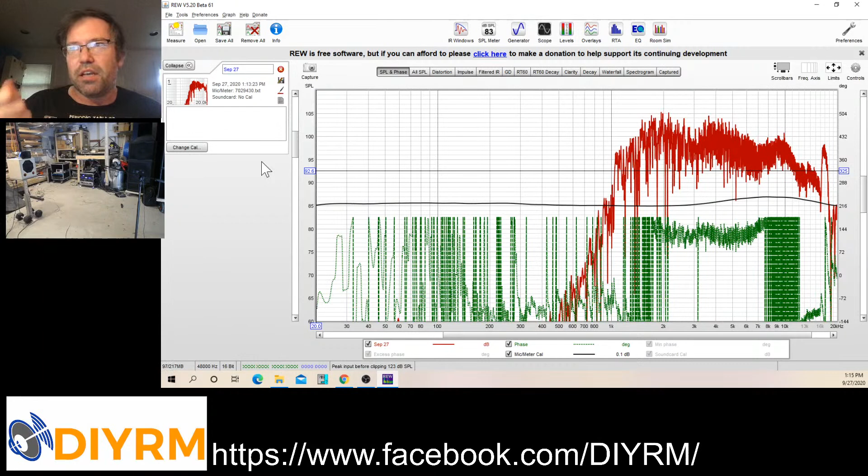Okay. Now, the default for REW is a quite wide window. It's a gated measurement system. We can zoom in on a period of time that we want to look at that is quite small. And as a result, it narrows down and eliminates the room reflections and all sorts of other things, which is what we're seeing here. We're seeing all of the echoes. But I don't like the default impulse display. So I'm going to go over to the impulse window here. And this is what you see when the program first starts up.

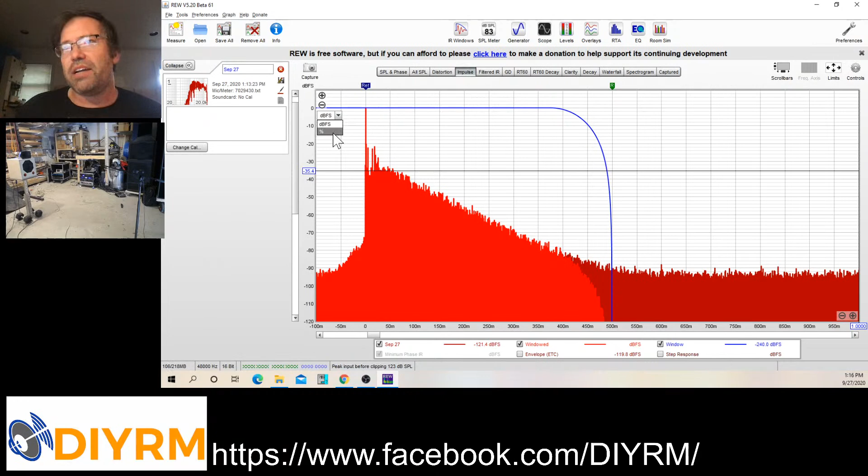So what are we looking at here? We're looking at energy versus time, in the units of dB. If you're doing room acoustics measurements, this is actually a very useful display, but when you're trying to look at a speaker, this is not a useful display. I have never found this particularly useful. So I change it to %.

And now you've got a picture of the impulse, still very long, right? We've got a second of time displayed here, which for measuring a speaker is forever. Okay. That is a very, very long time.

What you can do, though, is use the graph here, change your graph axis limits to go to a reasonable time. And if you're measuring speakers in a room like I am, the time is very short. Sound is fast, right? 343 meters per second at room temperature and sea level. And so you end up having to really zoom in on it. Whoops, wrong way. And now I am looking at a very, very small section of time. Okay, I am looking at 20 milliseconds of time. So this is a very, very short section of time.

And what you see is this is the primary impulse coming from the tweeter. And this is the first reflection, whether or not that's floor or ceiling. They might be lining up pretty close to it at the same time where they are, right? So we're going to want to set our window, the period of time that we're looking at, to be only that little bit, okay? And there's a couple of things that you have to watch. The first thing is you have to watch where your reference time is.

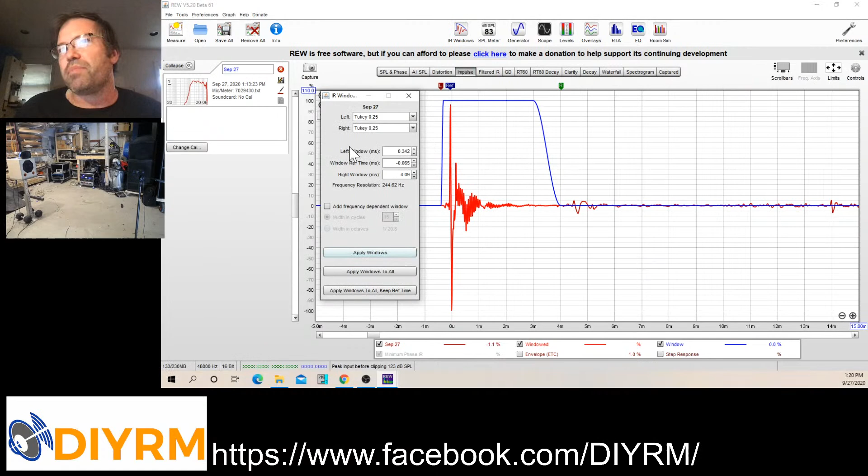So I'm going to go back to that impulse window and drag this back here, and now I've eliminated that, okay? Apply that. Now we go back to our SPL window. Now I've got the SPL for the tweeter, all right? This is a useful speaker measurement, okay? You can actually see what's going on here.

Remember earlier when I had the limits set really wild? I'll do it again. Like quieter than the sun, or quieter than a molecule. We'll go louder than the sun, right? You see this all the time. That's not louder than the sun. That's just a car audio. But you see this all the time where now people are looking at this and say, oh, look how smooth my speaker is. Well, it's not. You've just plotted it so smooth, right? So back to useful settings, okay?

But what we don't know is exactly what voltage we put into the speaker, okay? I have just set it up, I've set the volumes, and I've played the tone, and I have no idea if this is a 2.83 volt measurement. So what I'm going to show you is how to measure that, right? So everybody with me so far?

Do we have any questions? Can you hear me? Am I just talking to myself for 29 minutes, which would be awesome? It would be like a normal Sunday, really. This delay is killing me. You guys are seeing it probably a good 20 seconds or so after I do it. All right.

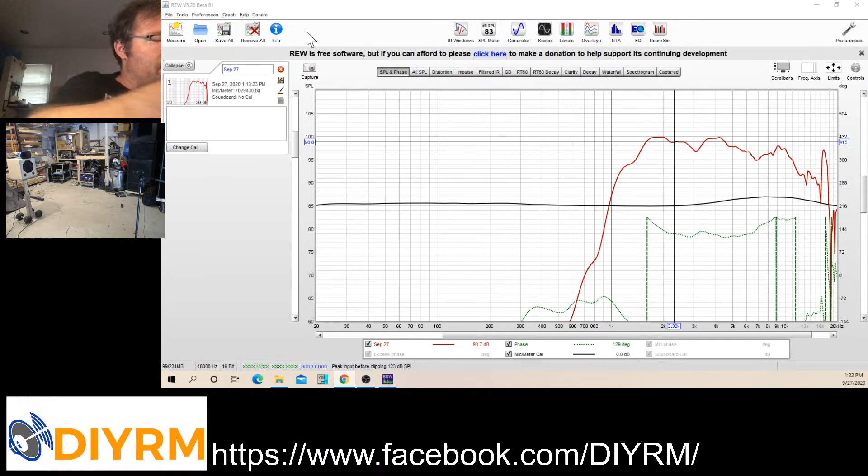I've got a wire issue happening here. Hopefully we don't hear a crash or a bang or Scott crying because I dropped something expensive or unplugged the live stream. Hold on, I'll be right back. I gotta go get that wire.

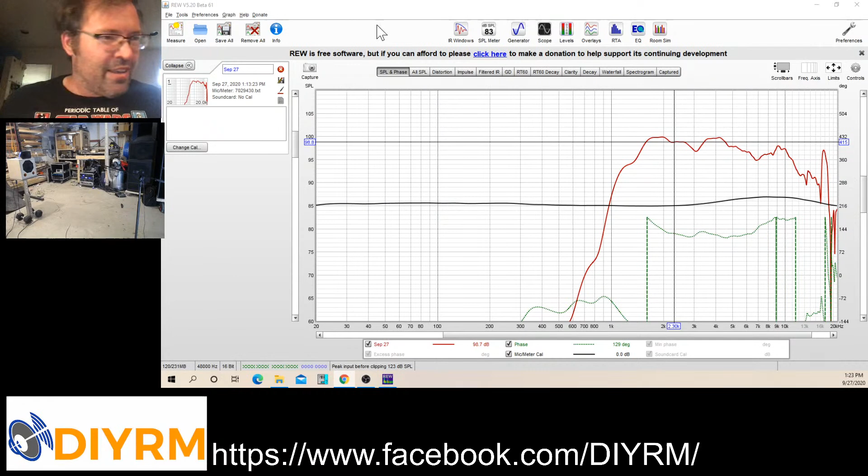Okay, so I have a trusty voltmeter with an untrusty battery. It is going on me. I don't know if you can see this. Okay.

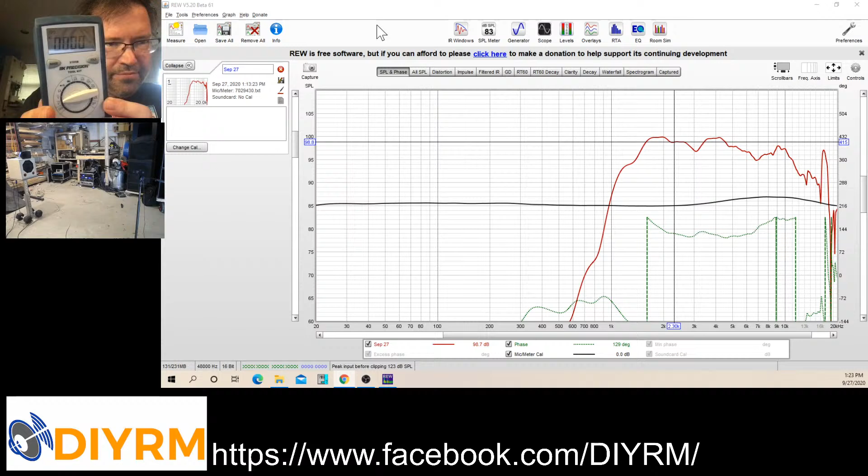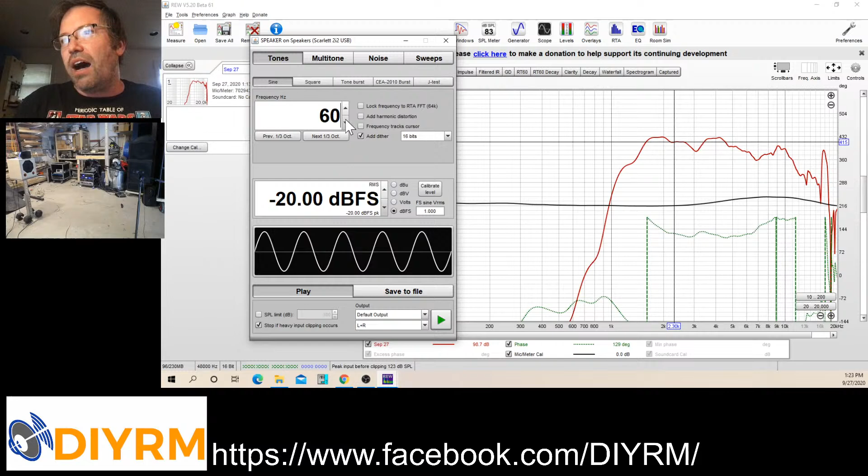What I'm going to do is I'm going to use the generator function of the REW. Okay, and I'm going to go to 60 hertz. Use 60 or 50 hertz because even inexpensive DMMs will read that properly. If you're too high in frequency, they're not going to read it accurately. Like aircraft power, internal AC aircraft power often is 400 hertz. They might be able to do that, but sometimes when you get into the 1,000, 2,000 hertz range, they don't read properly.

And what I'm going to do, since I've got everything unplugged, I am going to do something relatively scary, and that's go to 0 dB full scale. I am going to put the full scale output of this thing, and I'm going to double check that I'm unplugged. Yeah, okay. All right. We are, no. I'm fooling myself. I'm not unplugged. Hold on.

Double, quadruple, triple check. Okay. Now we're good. That could have been bad. 10 volts RMS into a tweeter at 60 hertz. Poof, tweeter gone. You know what? All right. I'm going to start off. We're going to do just a quadruple billion check. We're going to make sure that we're not putting anything out into the tweeter. We are not. Okay.

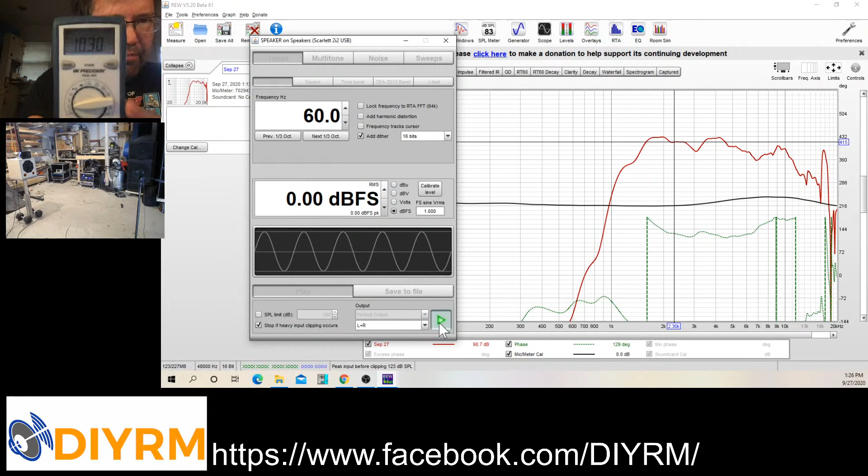So I'm going to play this 60 hertz tone now that I know I don't have the tweeter connected, and I'm going to show everybody what I'm measuring. Okay. So I am measuring 10.3 volts. Now, here's the coolest feature that has been added, to me anyway. I found this stupidly useful. Notice there is a full scale sine VRMS. I'm going to type 10.3 volts here. I am now going to click on volts. And now it is displaying the output in volts.

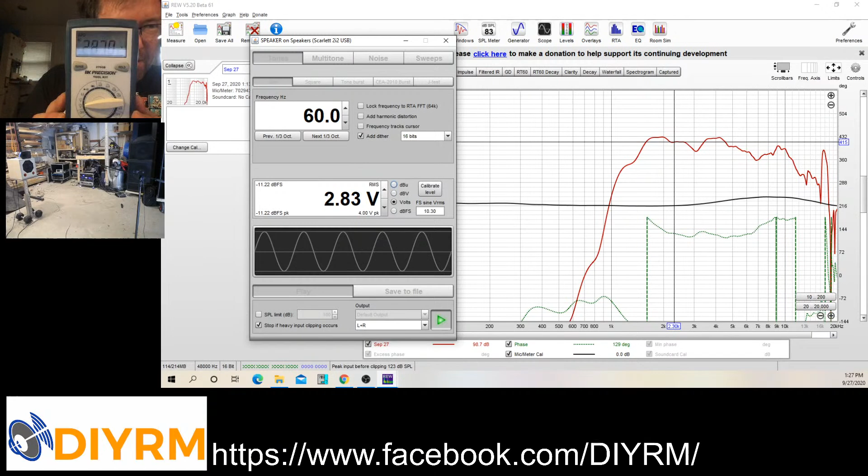All right. And now I'm going to change this to 2.83. That is minus 11.22 decibels full scale. I didn't have to do that math anymore, which is what I used to have to do. And lo and behold, what is the DMM showing? 2.86, but close enough, right? For our purposes, I'm not sure if it's the meter or the gain or whatever, but that is close enough to a 2.83 volt measurement.

So now I can start measuring and find my true 2.83 volt 1 meter sensitivity, because the calibration file for the UMIK has that. It should be reasonably good. I haven't checked this one against my Cross Spectrum Labs mic. It should be, in terms of absolute SPL magnitude, and it should be reasonably good for frequency response. It's probably going to be a little bit wonky, at least historically they've been a little wonky above 15 kilohertz. But now, as long as I don't touch any of those volume controls that I had, I have the ability to specify voltage into the speaker driver, which is really cool, okay?

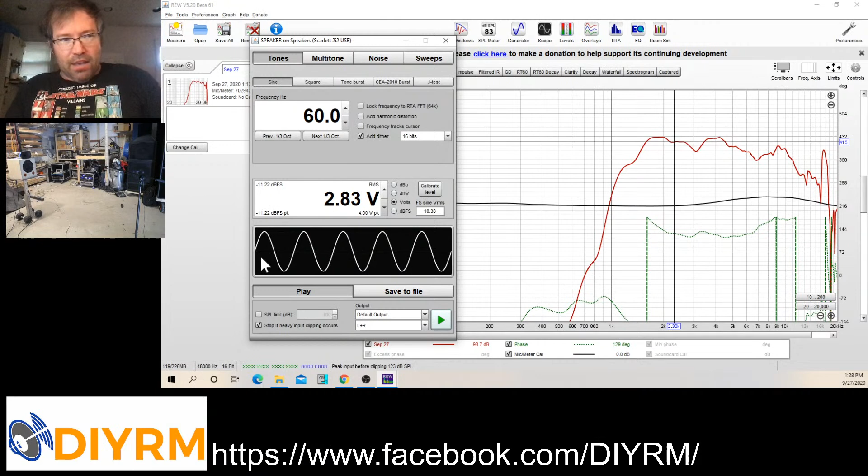So now I'm going to stop my 60 hertz test and hook everything back up. You're hooked up. You're hooked up. Oh no, you don't want to be hooked up. Sorry everybody for my chin. Okay. So now I am going to take another measurement, and I did not plan well.

So now that I'm at 2.83, I am going to do this. I'm going to be nice to this tweeter and not do a 2.83 volt sweep at 20 hertz. So now I'm going to do a 2.83 volt sweep from 400 hertz to 20 kilohertz, and this is going to be loud. So I'm going to plug my ears after I press start.

Okay, now look at what has happened. We have a much louder signal. I'm going to have to move this scale up. And we have gone back to our old wonky looking frequency response graph.

Well, there's a way to make this easier so that it does this for you every time. Remember those settings that we had for this one? IR windows, left window 0.33, right window 4.08. You can set that up as a preferred analysis. What you do is you uncheck set window widths automatically. We'll just put 4 here, and we will put those in.

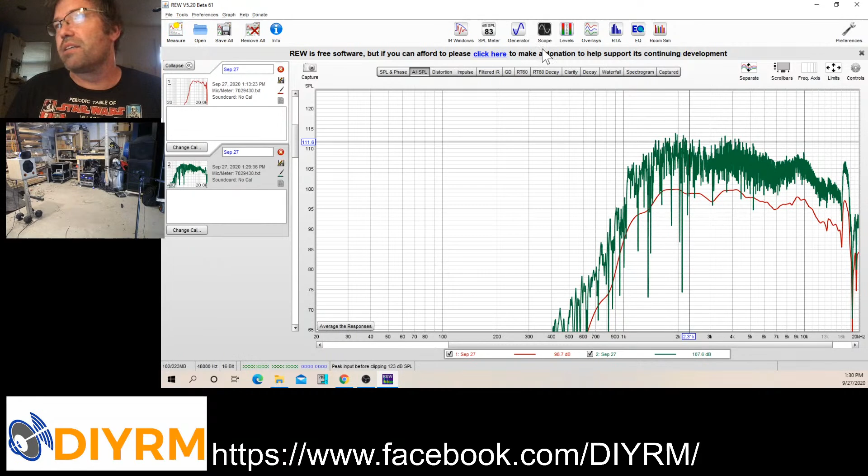And now I'm going to take another measurement, assuming I did it right. Let me go make sure. You can also, if you want to, have it do a little bit of smoothing every time. I'm not a fan of smoothing. Like, I despise it 99% of the time. So, all right. I am going to take another measurement. Here we go.

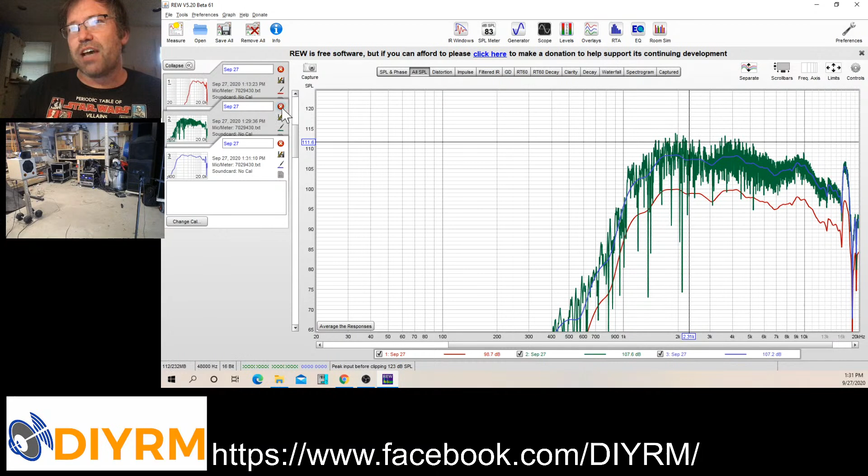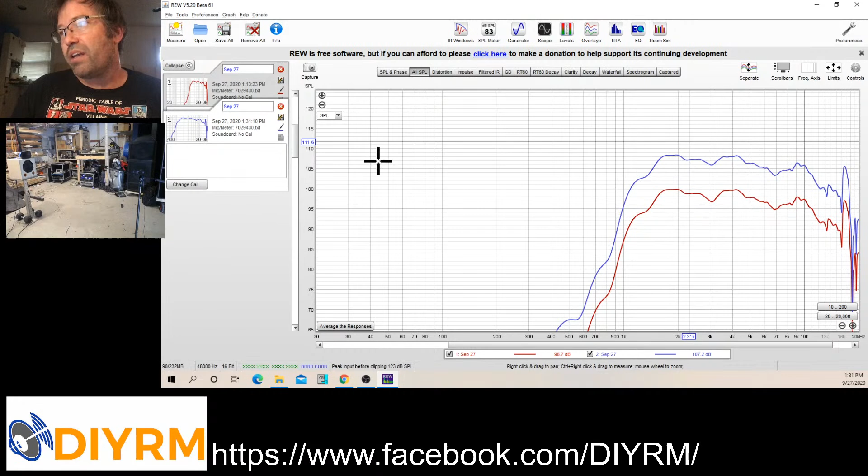And lo and behold, what happens? The measurement comes up and it's gated just the way we want it, and we don't have to go type that in every time. So I don't want this one anymore. So we have now taken a 2.83 volt, 1 meter calibrated, because my microphone's at 1 meter, SPL measurement for this tweeter. We've eliminated the room reflections, we have basically set our windows right, and we've calibrated it to a fixed voltage.

And my battery is running out, so I'm going to remember to shut that off, because I don't have any other 9-volt batteries. The kids have swiped them for their toys.

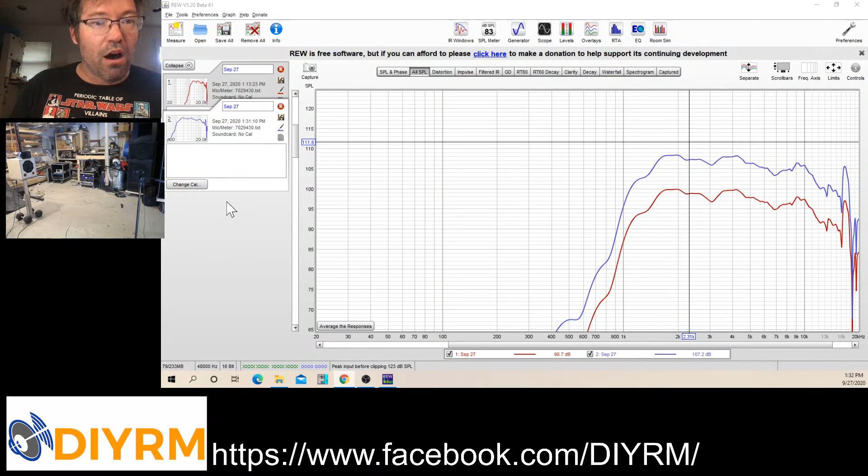We now have a good frequency response measurement. REW, because it's a swept sine measurement tool, does other measurements at the same time. One of them that's really, really handy is distortion. Okay, so I'm gonna click the distortion screen. As it stands, the distortion measurement as its default display, I don't find particularly useful.

My degree is in electrical engineering. I've done amplifier design for so many years that I'm used to looking at it in terms of percent, not in dB under the fundamental. So what I usually do is change it, using the units here, to percent. It'll automatically, on the newest versions of REW, change it to relative to fundamental. At least that's what I read in the manual this morning. And then the catch is that it usually puts the bottom and top so far that it's fairly useless.

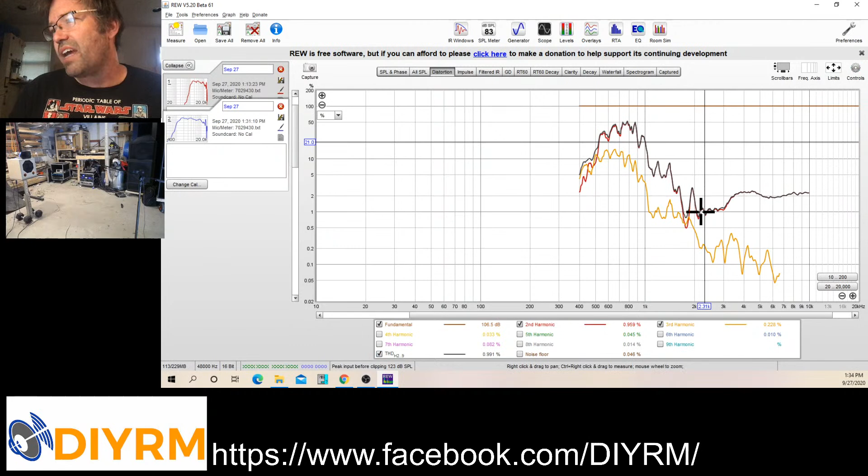I sometimes find the harmonics useful to look at, but for the most part, I usually just look at second and third and THD. And so at 2.83 volts, second order harmonics dominate. This spike might be a little bit bothersome in a final speaker, so you might have to do a little investigation on that. But they really don't take off till about 1.8 kilohertz. So you could probably cross this over fairly low.

Let's see, Brian, yes, I usually do almost all my measurements at 2.83 volts or higher, because I will very often go to this distortion screen to tell me if the driver is behaving at these levels. You have to be careful, especially with tweeters. You don't want to be doing a 2.83 or a 4 or a 16 volt sweep with the tweeters at low frequencies. You want to start at like 400 hertz or even higher. You let the distortion, and frankly how they sound, tell you if you're pushing them too hard.

I have had tweeters complain to me mightily, and I've actually blown them up once or twice on this, but I have found that to be extraordinarily useful for checking how well I think they're going to do, and where I need to be crossing them over.

So yes, I do run almost all of my sweeps at 2.83 volts. And for the horns that you can see over there that are 105, 108 decibel sensitive, my neighbors hate me, and my family hates me, and I'm okay with that. I can live with it for the purpose of science. It's all about the science. Anyway,

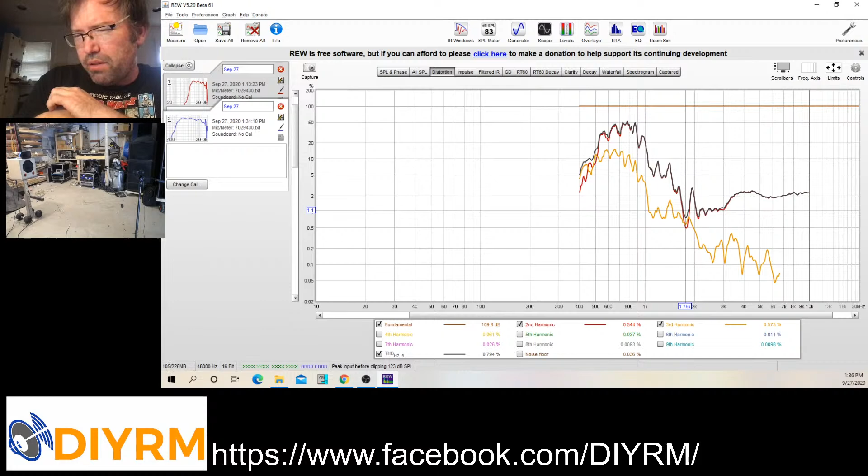Brian, let's see, when you run your sweeps, it's not loud at all. If I turn it up, it gives an error. Okay. Without knowing, I'm guessing the error is the clip detect error, and that could be caused from a couple of things. So yeah, message me over on my Facebook page. The link's there.

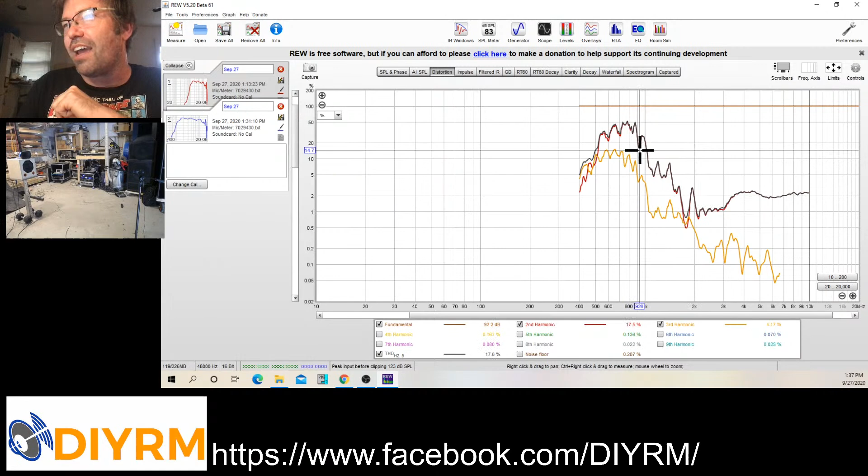500% at what's this, Brian? 500% THD. This tweeter seems upset at that level at 8. It's not 500%. It's just 50%. Where are you seeing 500%? And frankly, that's probably dominated by the room noise, Brian. I'm not real sure that that's really real. You can see if I go back to dB full scale, you can see that at that point the tweeter level is starting to drop off. So as it's dropping off, the room noise is starting to come in and pick up. Okay, so that's what you're seeing there.

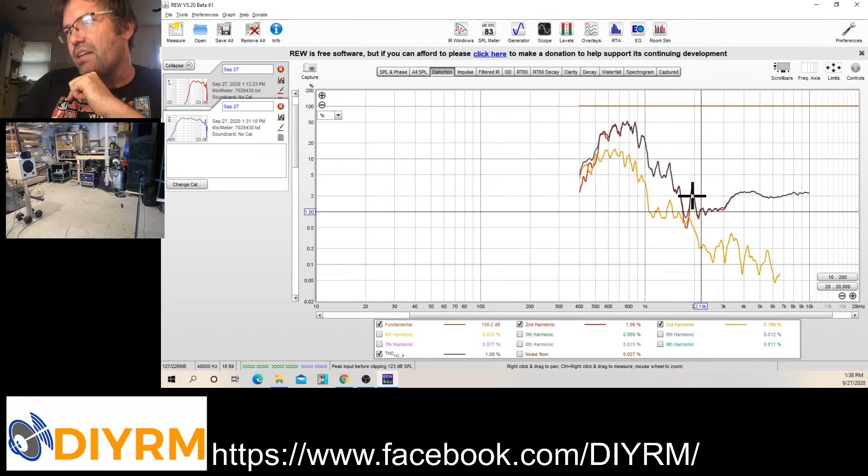What I'm looking for is where it starts to take off like this. Like it's good, drops, and then starts to pick up. This point right here, and as I said, this is somewhat concerning. This may be a little honky if I don't cross above that. Like I might want to try and do this at 2.2. I'd have to see, let's see. Yeah, it's in both these measurements. So yeah, I'd have to see exactly what's causing that. That may also be because I've got that tweeter horn just sitting there. That may be a bell resonance picking up on that harmonic and accentuating it. So we have to look at that.

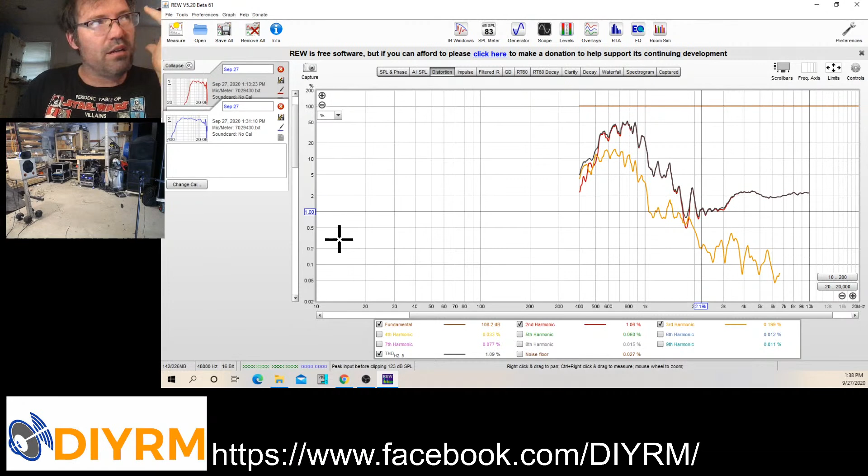Sorry, 50%. So that, and honestly, as I said, because that's room noise, I don't know how it came across on the video. That actually sounded pretty clean the whole way through. Your ear, depending on which harmonics there are, is very happy to ignore 5-10% harmonic distortion. It depends on frequencies and which harmonics they are and things like that. But second order harmonic, it's just not going to sound that angry. Dome tweeters sort of get angry slower. Compression drivers like this one, it'd be okay, and then it'd honk at you and it'd be really ugly.

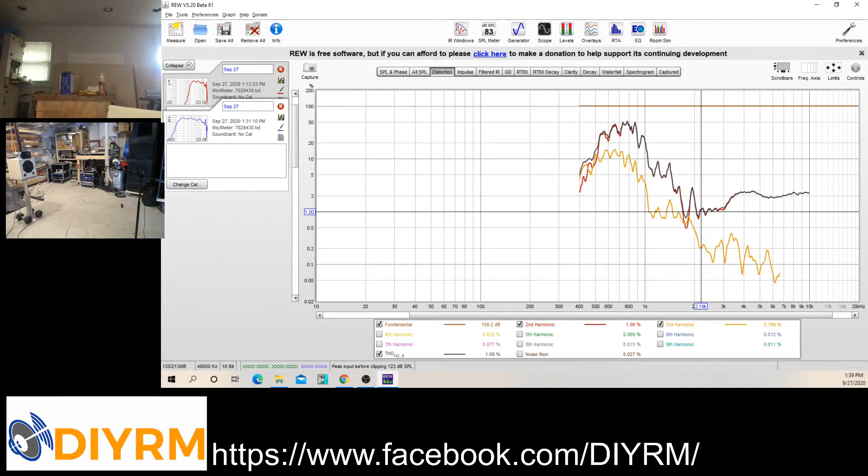Okay, so now I've taken the measurement for the tweeter. I'm going to go switch the wiring around and we're going to take the measurement for the woofer. And I'm not going to move the microphone. I'm just going to go change the wiring around. Be right back. Okay. Don't trip and fall. Okay. So now I have the woofer hooked up. I am still going to do this at 2.83 volts, but I'm going to go down to 20 hertz. And I'm going to take the measurement.

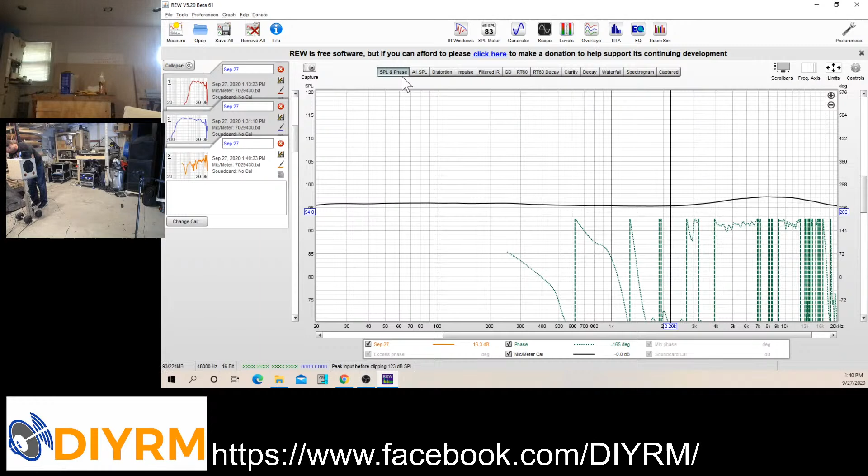Oh, something's wrong. Tech demo, live. Of course, we had the problem. What happened there? Do I have a bad cable? I'll be right back. Oh, I know what happened. Dang it. All right. Well, okay. Yes, we want that measurement removed.

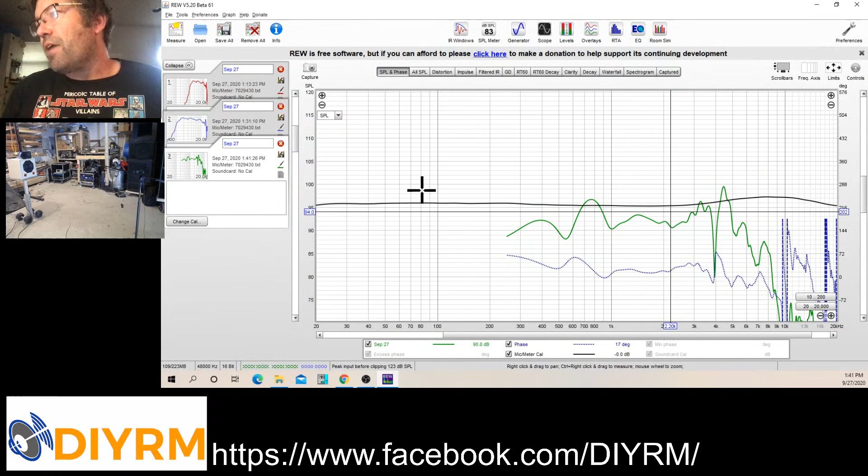Okay, so now I have my woofer measured. I'm going to have some crossover work cut out for me. Yeah, that's going to be neat. All right. So now I'm going to go to the all SPL measurement. Now I'm going to remove this one. Okay, so now I have both the woofer and the tweeter measured.

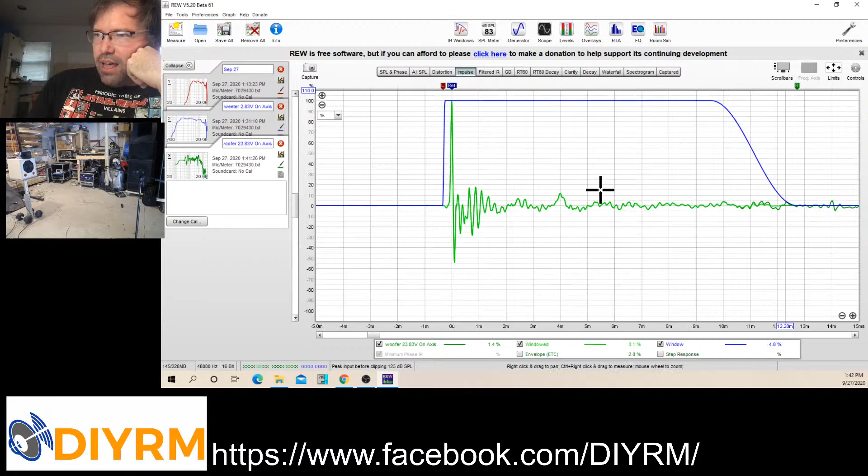But I have them measured at 1 meter. And what that means is that I am limited below 250 hertz because of room reflections and things like that. If I try and get data, I'm going to see room reflections added in, okay? So what that looks like for the woofer, and in fact, looks like the woofer's starting to creep in, is this. Okay, so as I move out, you see all that ripple start to kick in. Oh, it automatically applies that now. Cool.

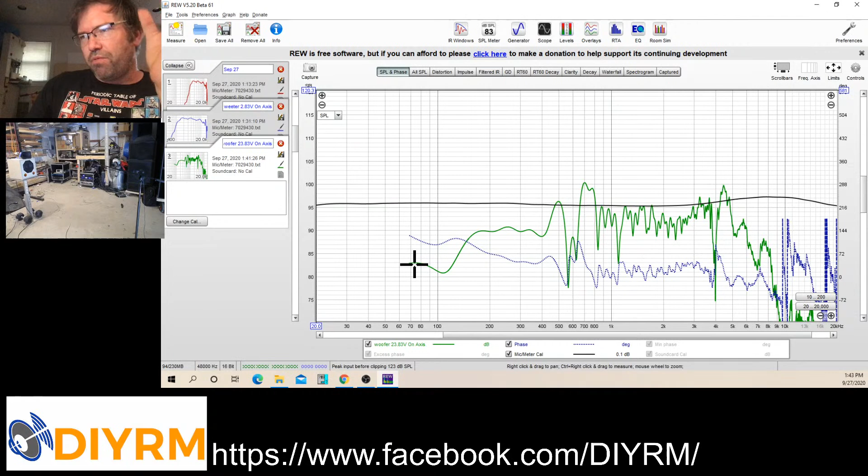If somebody looks at this, frankly, they're going to be horrified, and it's not a good measurement, and I've got all sorts of room stuff in there. But you start to see baffle step kicking in, although this seems to be a little bit low. So this may be a perfectly good example of why you can't trust an in-room measurement, because a lot of times those reflections start to add peaks and dips where your baffle step frequency is, right?

And that is bad. You're basically lying to yourself if you believe that, right? So I'm going to go back and change this. We know what the reflection amplitude is.

Okay. Now, I'm going to do one other thing here, and that is I am going to measure both the woofer and tweeter simultaneously in parallel. When you do this with like 4-ohm speakers and stuff like that, you need a pretty healthy amp to do this. But this will come back later, and we won't be able to finish this because I'm already seeing them at 52 minutes.

But you'll use this later when you put these individual responses into your crossover simulation software. You'll use this to check your relative offset between your tweeter and your woofer, so that you have that right, okay? If you can't get that right, then your crossover modeling isn't going to be right either, okay?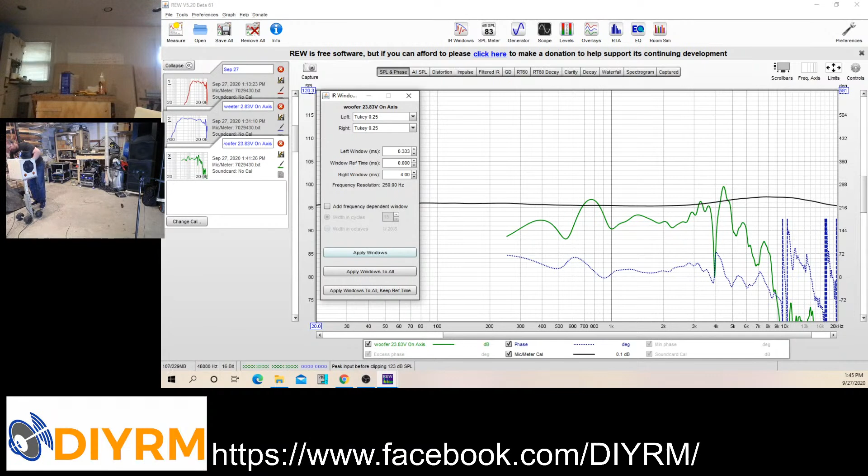So let me do some more wiring. I had no idea how much wiring I was going to be doing on this thing. Now, this is where you have to be careful. I don't want to do this to my poor tweeter at 2.83 volts at 20 hertz, although I've done it, it'd probably be fine. I'm going to change this to 1 volt RMS, also to keep the volume levels reasonable.

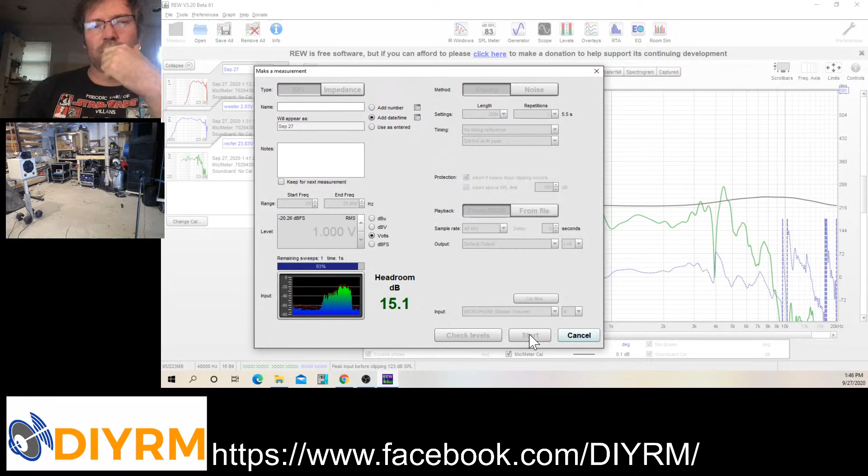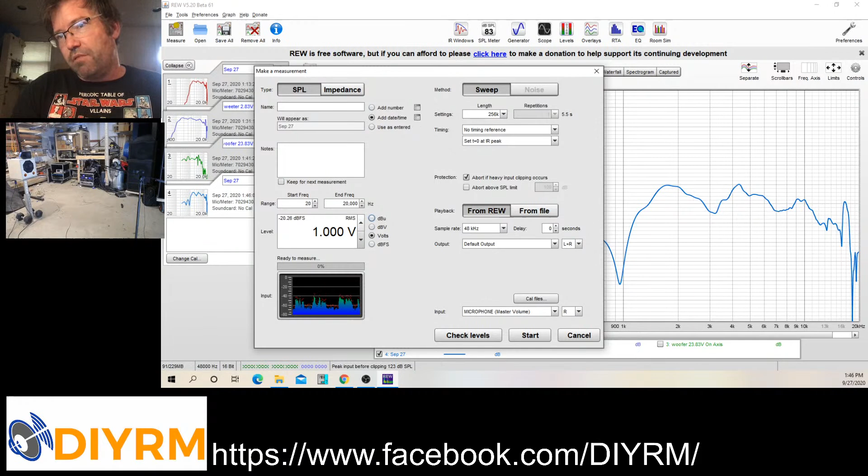Okay, so now I'm going to go back to this screen, tweeter off, woofer off. There's a couple of things that we can do. One of the things that we can do is that if we look at our measurement here, 1 volt is minus 20.26 decibels. 2.83 volts is minus 11.2. So that's roughly 9 decibels, roughly, right?

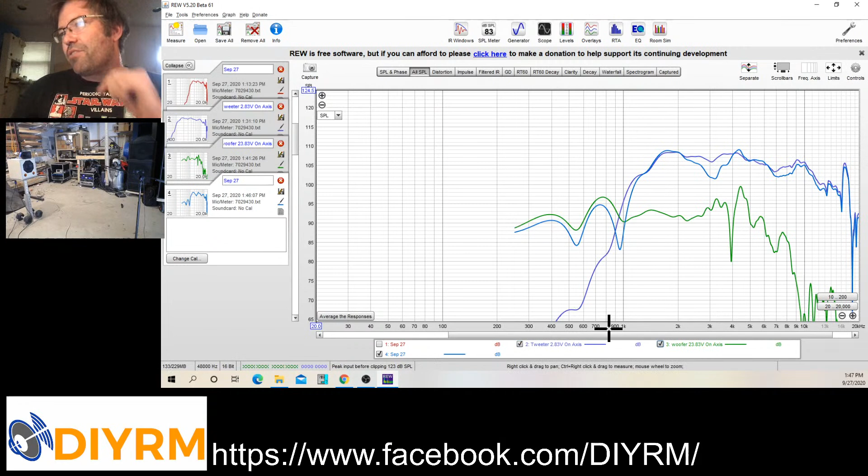So what you can do is you can now take this measurement, and you've got some actions. Oh, he changed this. You can add 9 dB to this. Now, it's back up to that level, and I didn't have to make myself deaf or worry about breaking a tweeter. So now I can go through and, looks like I might have added a bit too much to it.

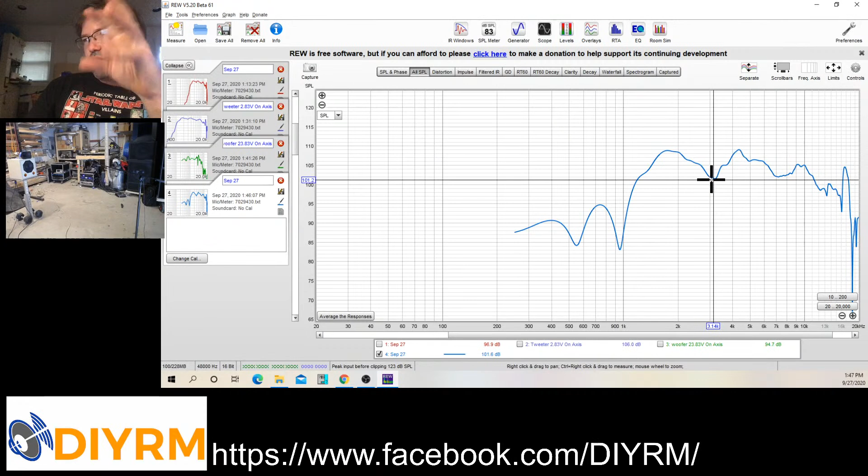But the important thing for this is that, see how it's got some dips here? When you put this into your crossover simulation, and again, this is sort of more advanced stuff, and you run the tweeter and woofer without a filter, if you're not seeing these dips in the right magnitude and place, then you don't have that acoustic offset right between the tweeter and the woofer, okay?

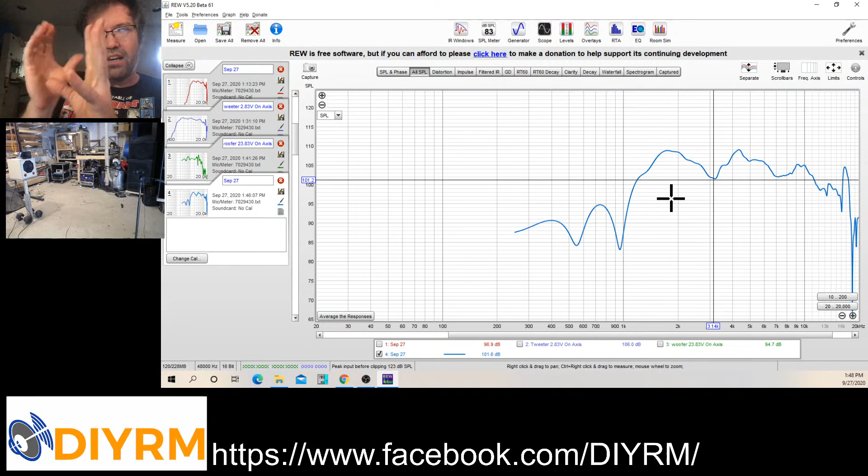And that means your crossover, when you simulate it and you actually build it, is probably not going to sum quite right. Sometimes the errors are small, sometimes the errors are very, very large. And this has driven me crazy. I actually had a speaker where I didn't realize there were some digital delays getting in there, so there's often some issues with this. That's part of a whole nother video that I've got to do, and so we'll hit that at a later date. Okay, now I'm going to do some near field stuff.

Okay, so notice that I haven't moved the microphone. In the past, I have actually put a stick on a stand, so that if I ever need to bring the microphone back to this location, I can. Because sometimes you lose measurements and things like that, and you need to be able to get back to the exact location that you were before.

I've actually known folks that will never move the microphone. They'll just have a second microphone that they use for the near field stuff, and they switch between the two of them. In this case, since it's just a demonstration video, I'm going to move the microphone, which means we've lost our reference place forever.

Oh, there's one other thing I want to show. The impulse response. In fact, I'm going to do this one more time. This is a cool thing. Okay, good. I'm back to 1 volt. The impulse response. Okay.

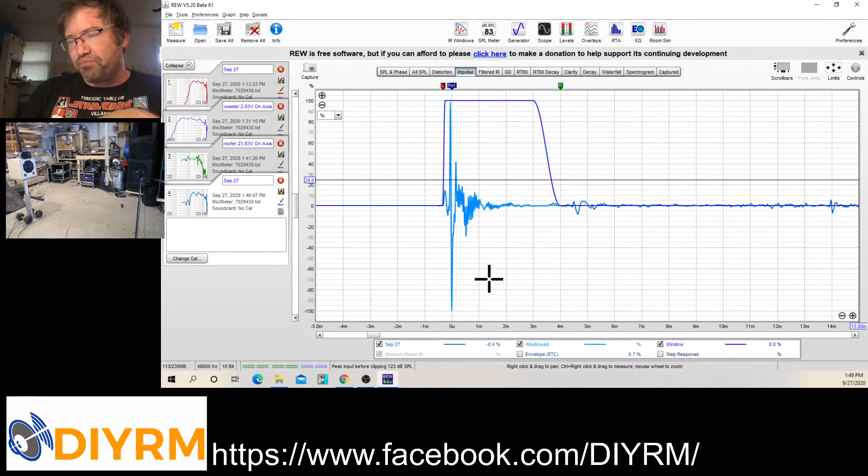There's a cool trick you can do, and again, another video. I always run out of time. There's a cool trick you can do with a second speaker next to the microphone where you can check offsets. There's also the loopback method. There's all sorts of cool stuff that you can do here. But this impulse response, let's see what it looks like as a step response. Nah, it's not going to be helpful.

It's basically showing that right now, it's looking like, to me anyway, that the tweeter is arriving slightly after the woofer is starting to arrive. So you know what I'm going to do? I'm going to go move it. We can do this.

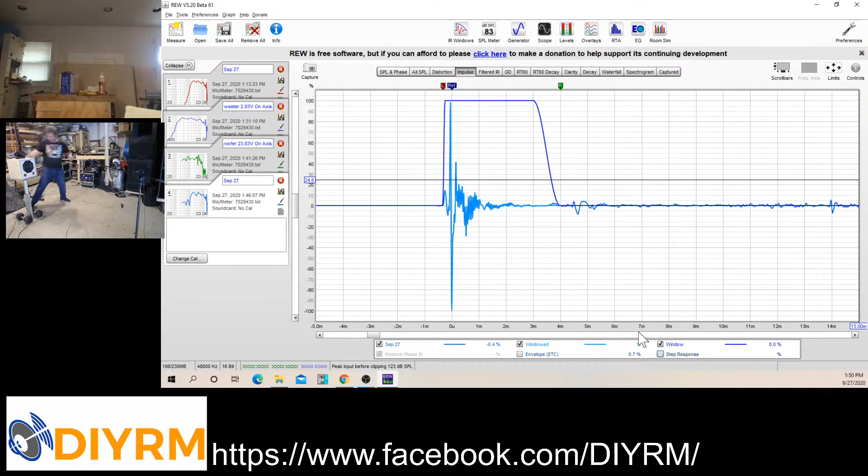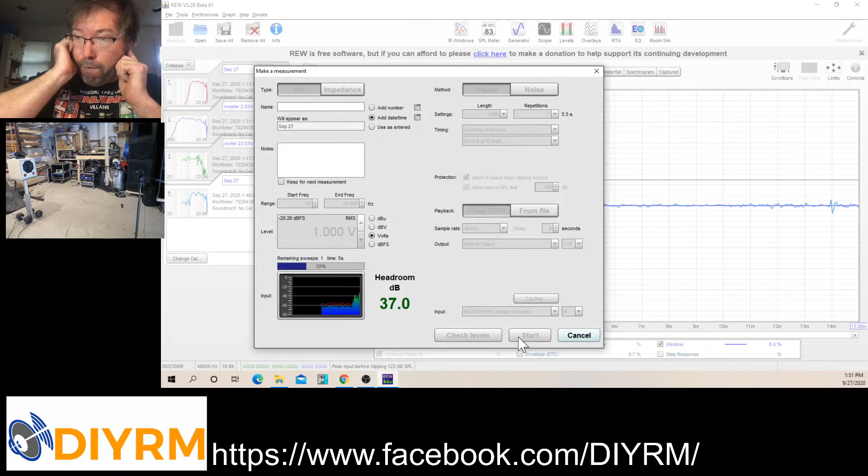Okay, now I've moved it back a pretty good distance, and what we're going to see is the reflections creep in from the top of that speaker box, because there's no way it's going to miss it at this point. Oh yeah, look at all that hash up top. Aha! Okay,

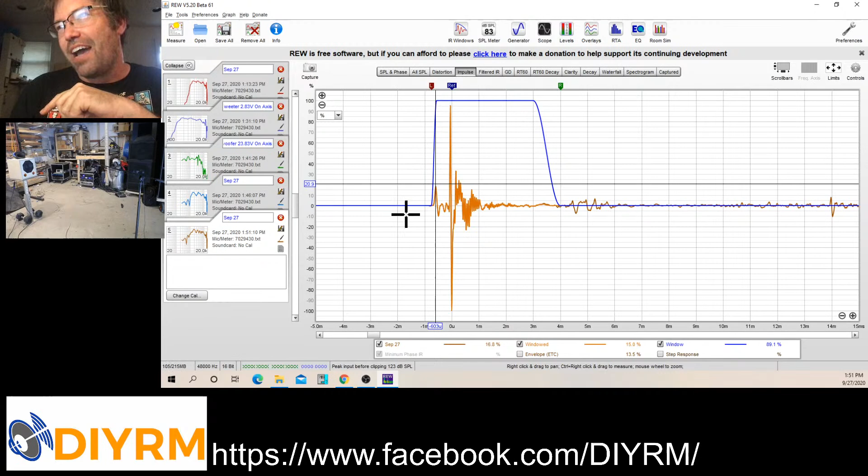so here is the tweeter, and way in front of it now is the woofer. In fact, I'm not even capturing the woofer. Now I've got the woofer, okay? And now if I go back to this SPL screen, all this ripple that is up here, that's the reflection off the top of the cabinet, okay?

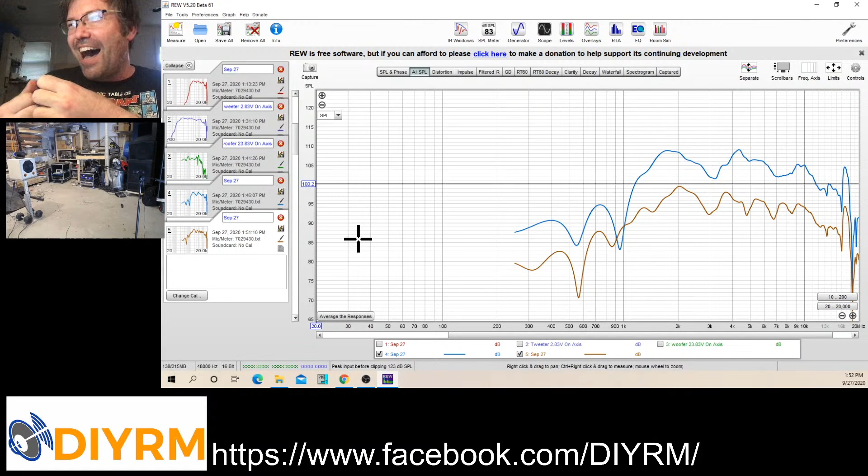So you can use that impulse response to sort of, I actually wrote a paper on DIYRM about time aligning PA systems. You can use it to, as I put it in that paper, park your DeLorean in kind of the right spot. It's not quite right. It's really hard to do that visually. It's not that the information's not there. It is. It's just that visually,

a few degrees in phase is almost nothing that you see visually. And if you're making sort of wholesale visual changes to where that impulse is lining up, a lot of times you've gone way past where you need to be once you add the filters in, etc. But anyway, you can use this, as I said, when you put your crossover in the simulator to double check your relative offset.

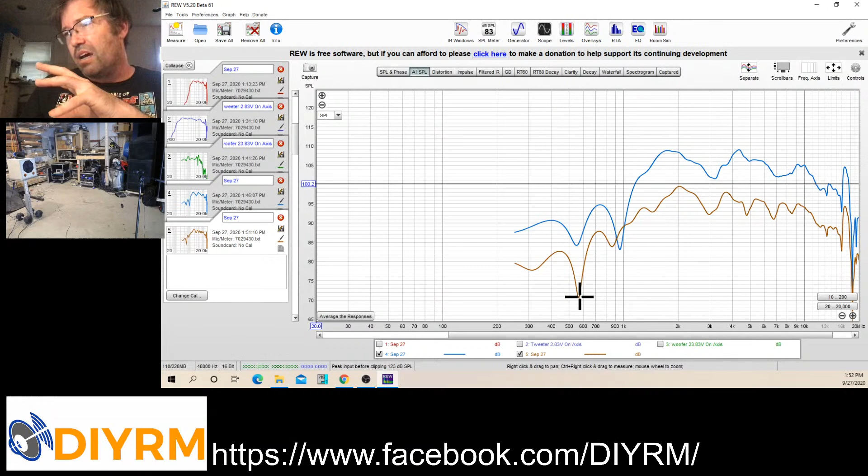You can see how moving the tweeter changed. This dip disappeared, right? Like this dip just completely disappeared. Whether or not that disappeared because of reflections filling it in or time, I'm not 100% sure. But it looks to me like this dip moved down to here because of time, because I've shifted that tweeter back. So now I'm going to go do a near field measurement on the woofer.

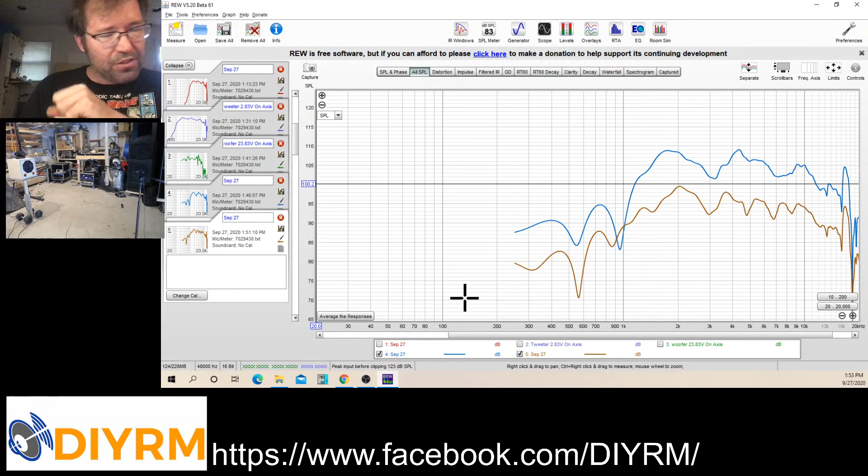We'll take another 15 minutes or so, and then I will shut it down. So we're going to take a near field measurement on the woofer, near field measurement on the port. I'll show you adding those two together. And then I had planned on importing a baffle step and sort of merging everything, but we're just going to have to merge it, and there's going to be some error, and I'll point you to a paper that I wrote on making that merge correctly, so that you avoid the error of baffle step disappearing from your near field measurements, because that is an error.

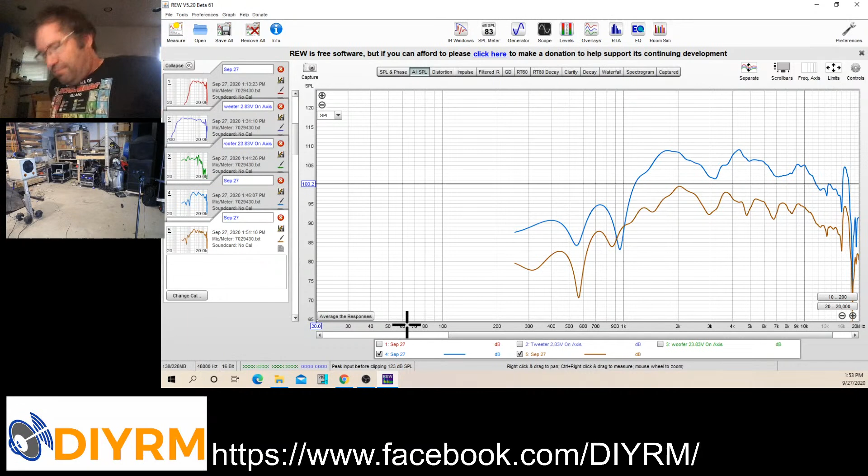All right. Oh no, I lost time reference. It's gone forever.

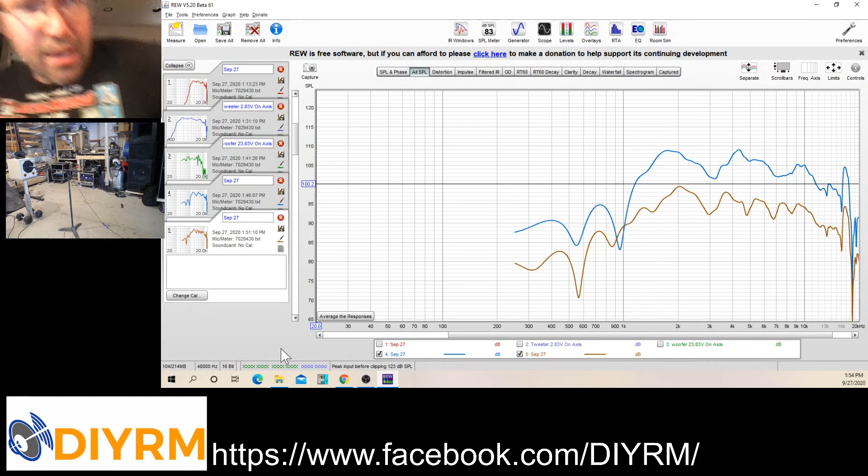All right. I am now near field on the woofer. 1 volt may be too loud, but we're going to find out. In fact, you know what? We're just going to go down to 0.5 volt because I don't want the woofer dust cap to smack into the microphone. And I've done that on some very expensive drivers. And it's not good for the microphone. And it's not good for the driver.

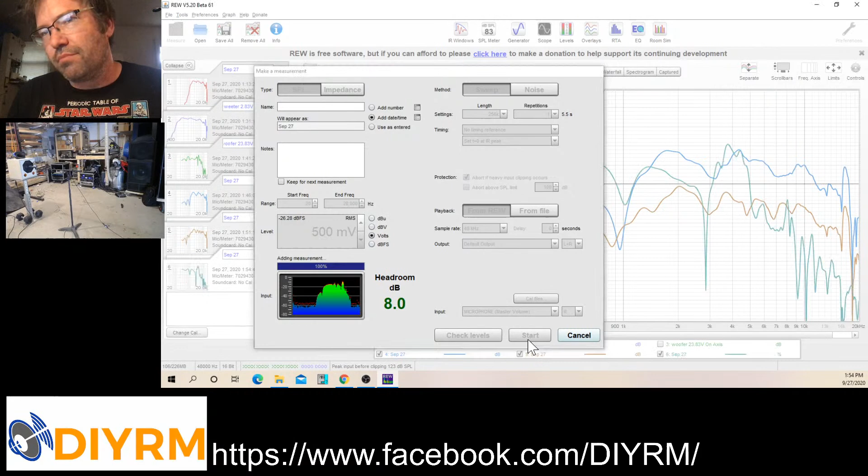Okay, now I have a near field measurement on the woofer. So, here's the deal. When you do that near field measurement on the woofer, the impulse response that you get, this gating that we did, that can go way far to the right, right? The room reflections are going to be so tiny in magnitude that they almost don't matter. So there is my

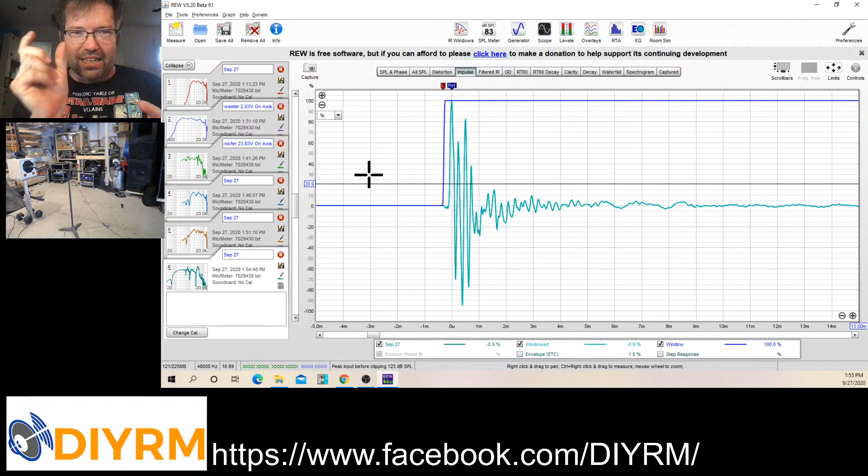Been there, done that. Yeah. I think if you've done enough measurements, you've smacked the microphone with the woofer. I did it with the 18 HP 1030s, and I smacked it so hard that I moved the microphone back. Whoopsie. So luckily that's a really hard dust cap, and it was fine. But that could have been bad.

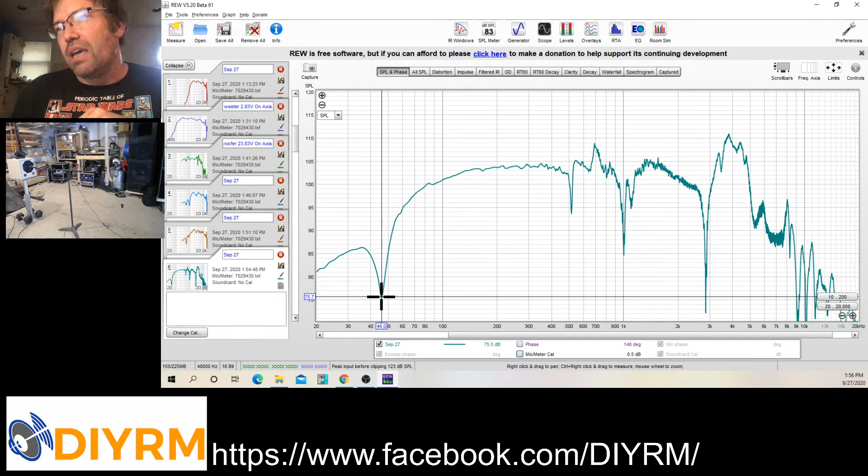So now, I am going to look at this near field measurement, okay? I'm going to turn off phase at this point, and I'm going to turn off my mic cal because that is just going to make it confusing for us. This minimum is the tuning frequency for this cabinet, and that is, if I remember correctly, right about where I wanted it. So good for me. Yay. I'll have to go back and look at my simulations, see if that's exactly where I wanted it or close to where I wanted it. So now I'm going to go measure a port.

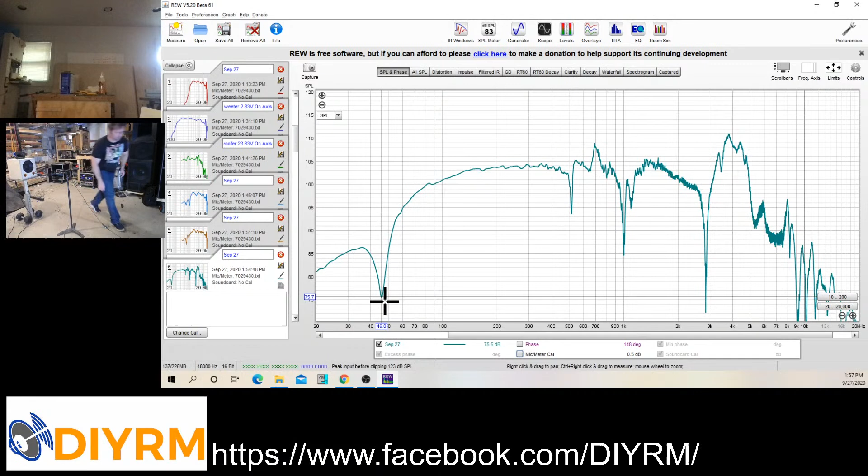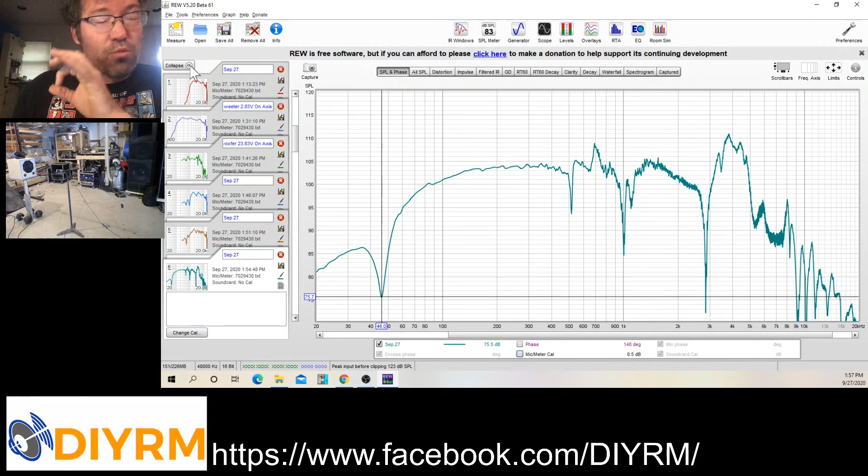Okay, so you saw how much time I took to do that. I got the microphone lined up on the dust cap pretty easily. It's really important to be at the center of the port and right flush or even slightly inside that port to do the port SPL measurement. If you're off center-wise, the shape starts to change. It does weird things.

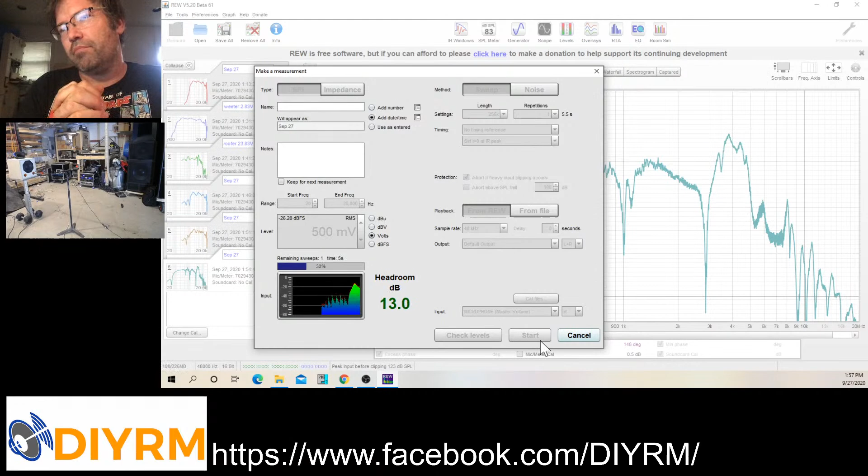Ooh, I have a pipe resonance. All right, so same thing. Move that window way over to the right, not that far. Oh, yeah. This is an unstuffed box, so I'm not real surprised that this is happening. But yeah, ooh, that's, ooh. This is what happens when you do a demo live. This box may not get a final build this way. Rats. We'll see. We'll see what stuffing it looks like.

So now I have the near field port. Its peak is right around that 45 hertz range, which is good. That's where the minimum was. They should line up. If they shift too much, you've measured your port wrong usually. It is possible for them to shift ever so slightly, but most of the time that's a port measurement error.

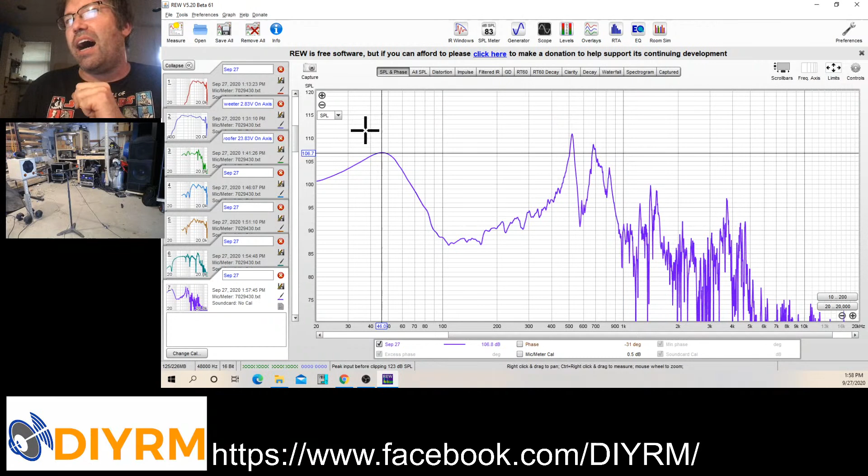Okay, so now go back to the all SPL, and oh my gosh, look at all these plots that we have. So what I'm going to do, I'm going to start labeling some of these. Woofer near field, port near field.

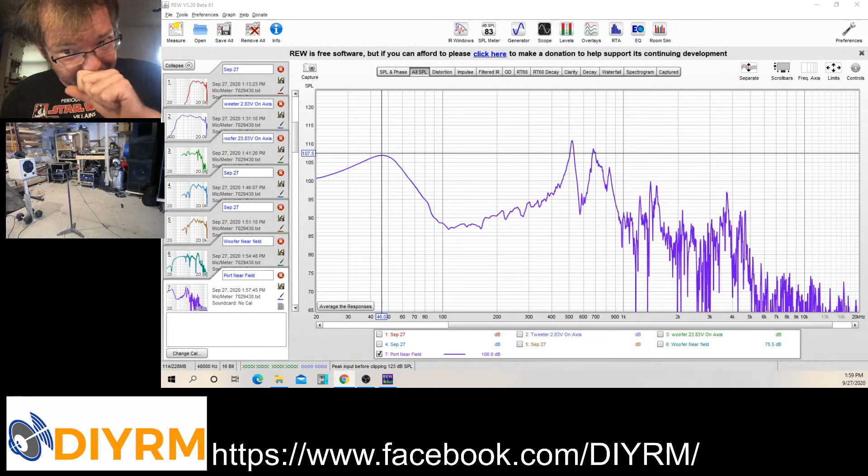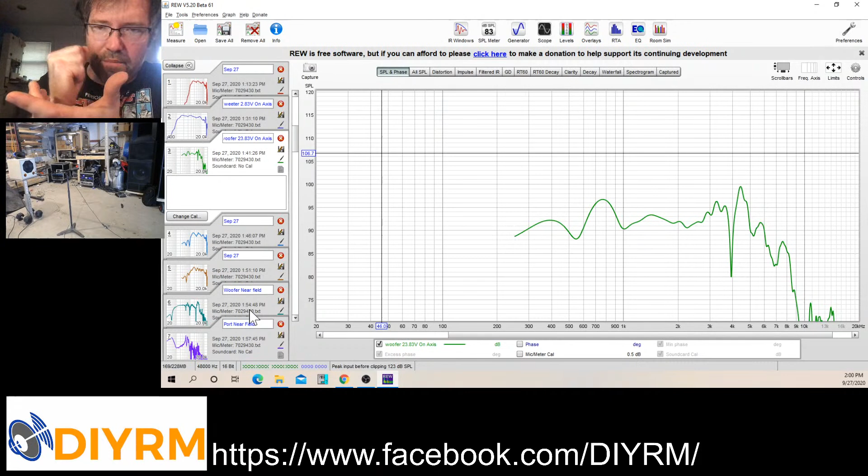Near field, how do you do drivers? That's a great question. You get right next to the phase plug. You get as center as you possibly can. You get right next to the phase plug on the woofer. I have actually measured there and the tip of the phase plug to see if there is a massive difference. And then I have verified by taking them out ground plane and found that a lot of times that sort of that joint where

that joint is where the phase plug is sort of hitting the cone, and that's the best spot, because if you're up here at the tip of the phase plug, you're awfully far away from a moving thing and you're not truly near field anymore. So that's been my experience. Your mileage may vary, but the way that you can check that is to do a true ground plane measurement out in a big wide open space. Put the speaker on the ground, put the microphone 2 meters away, and then you can double check because now you can run quite long gating if you do it that way.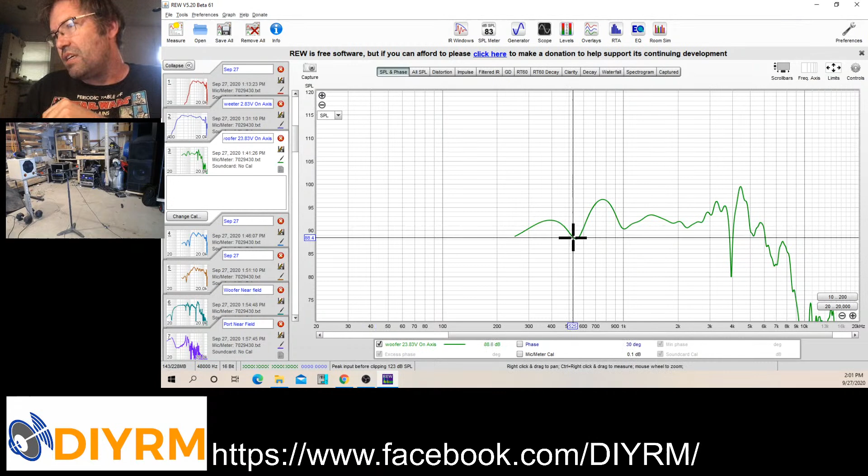But yeah, that 500 hertz, it looks like that may be starting to creep in there. But again, this is an unstuffed box. So shame on me for being lazy and not going out to the storage shed. I knew I should have done that. I knew it. Anyway, all right. So all SPL, woofer near field. Yeah, see, near field, we've got some stuff going on here.

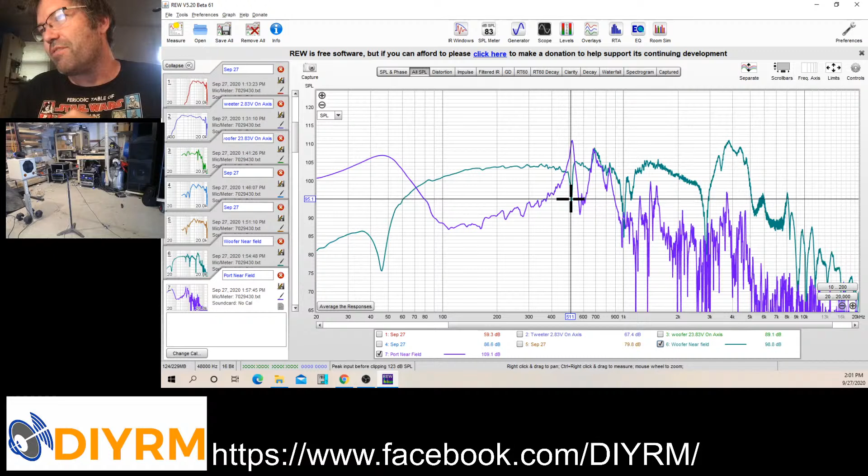So now a lot of folks scale this by using the port areas and things like that. I don't. I totally cheat. Port near field. I want to copy that response so I have a good one now that I'm about to mess with this one. Down, down, down. Yeah, that's looking weird. Something.

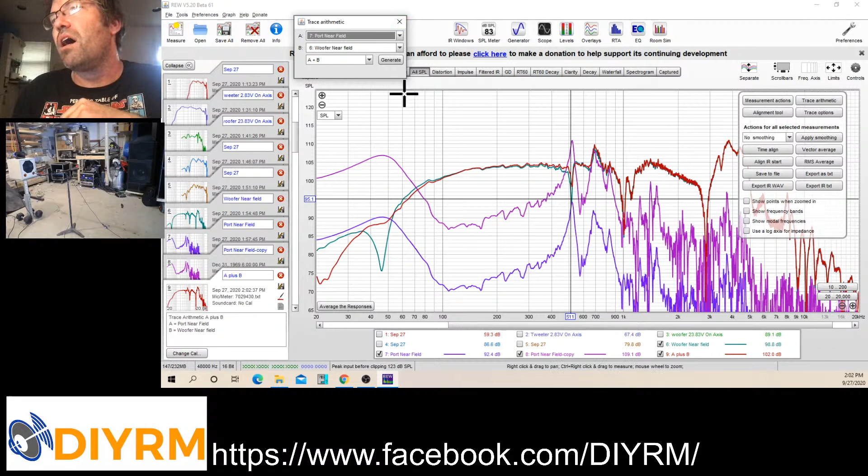Let's see if this may be where the demo truly comes off the rails, because that is not looking... That is not. An impedance would help me here too, but let's see. Yeah, that's not right. Something is not right. Huh? What did I do wrong? Yeah, because that is not enough output. We're gonna pretend that never happened. Oops. That is no good anymore. This is not the port near field. Yeah. Let me try one more thing.

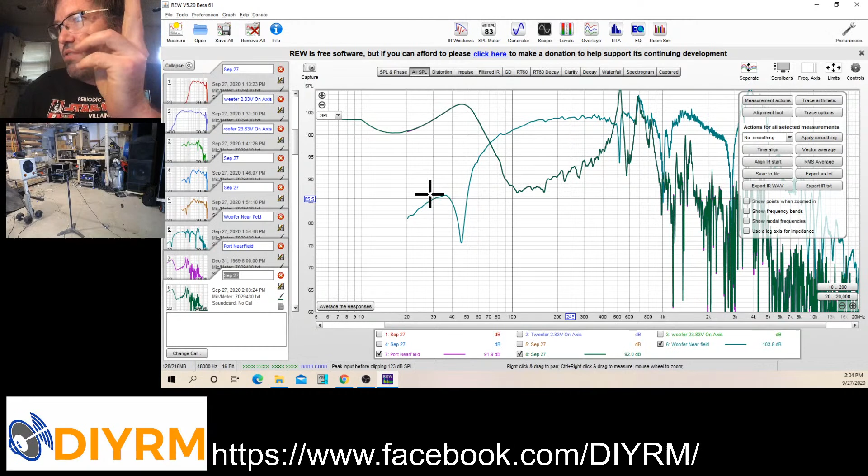Yeah, that's confusing me. I'm going to have to come back to that one. All right, so now we're going to end this on a low note where I have totally screwed something up with that port measurement, because that is not scaling right for some reason. And I know I have 2 of them, but even if you add 3 dB, that's not right. So that is some basic measurements and a screw up, because it happens to everybody, on using REW for these kinds of things.

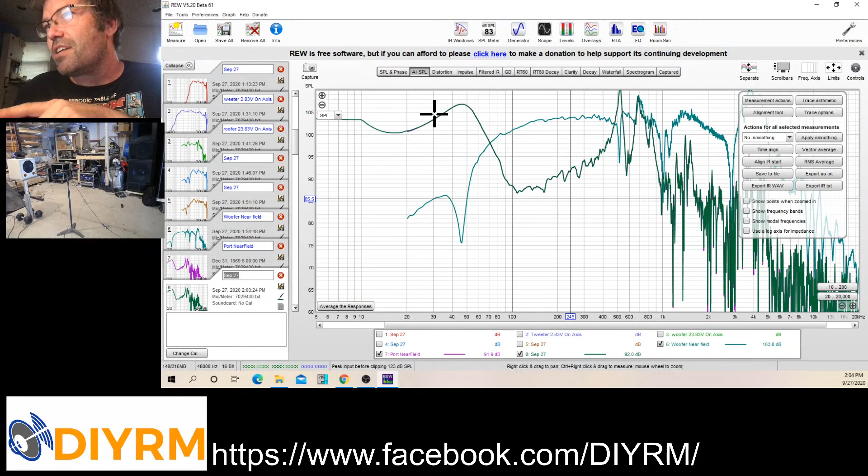This is going to bother me. Give me a second here, folks. What did I do wrong? Unless... yeah, because that port, it should be... what did I do wrong? Yeah, because I'm having to take, even if I add 3 dB to that, well, we'll try it. Let's see.

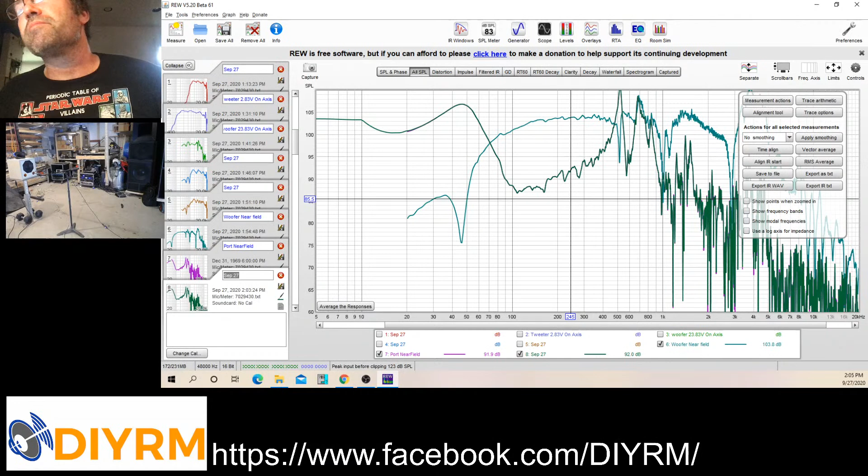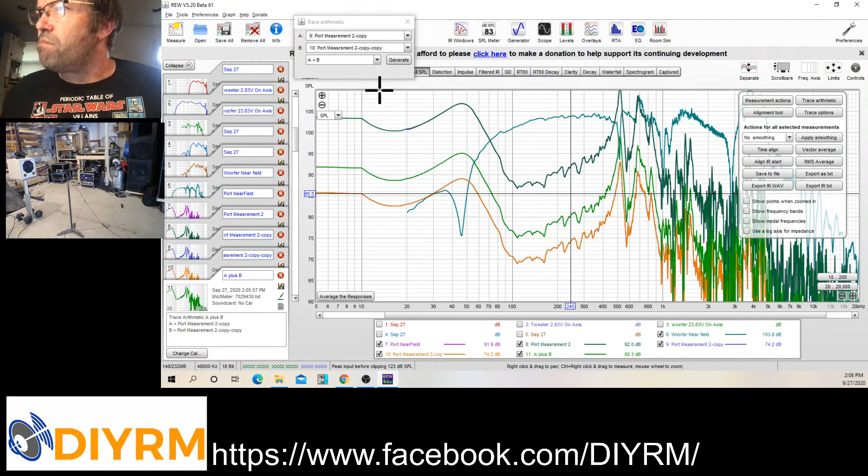Measurement actions, port measurement 2, response copy. Trace arithmetic. Is it 6 dB? Okay, well, that may be better, but it's still not. Now you guys are getting a lesson in all the trace arithmetic that we can do. And you can actually do some things that don't mean anything in real life, but let's see.

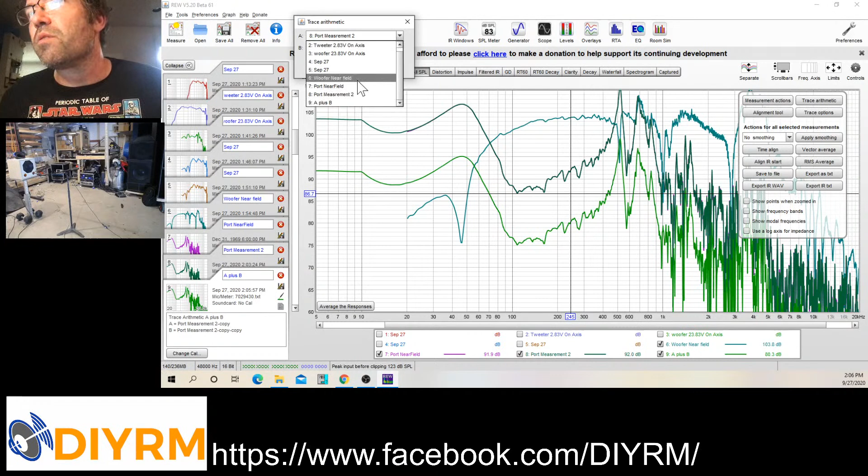Yeah, this is not an extended bass shelf. There's something weird going on. I'll have to figure that out at a later date. Any other questions? I will figure that out, by the way, and I will post something on DIYRM as to what I did wrong there, because that should have worked. But I'll have to figure that out later.

Any other questions? Very interesting to see how the unstuffed box and the port impacts woofer results. Oh yeah. That can. In fact, we didn't do an impedance measurement, but I wouldn't doubt that we've got all sorts of wiggles in an impedance measurement that would be helped.

This box has dimensions internally... I was sort of working with restrictions on what this box needed to be external dimension wise, and so internally this box has a lot of dimensions that are similar. So there's going to be some standing waves that could be stacking up here too. And they could also be leaking out. So I'm not sure which one we're seeing here. That's why I cheat and use transfer function. Yes, I have totally cheated before where I use the simulation and I just merge that in, Brian. Yes, I have totally cheated.

I was also desperately hoping today to be able to measure outside. And you can see me sweating. But it is sunny and 90 something degrees today, and hot and humid and mosquito-y and windy and disgusting. It's like 85 degrees in this garage. And so ground plane measurements outside were not going to be doable today.